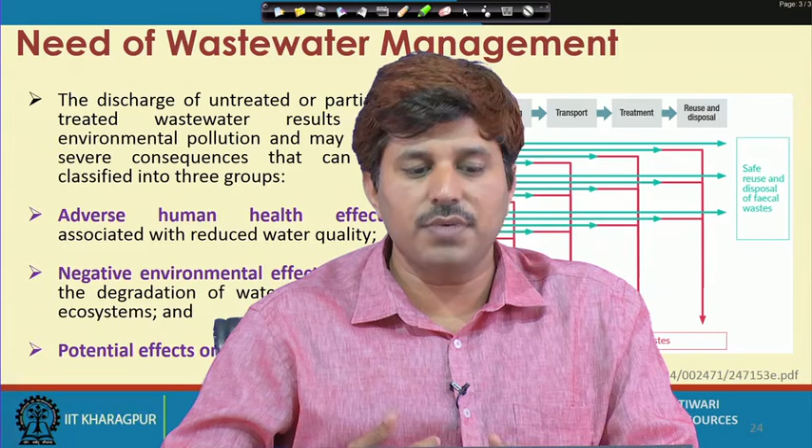To begin with, first thing comes that why we need wastewater management. We have been using water since ages. We have been letting the used water or wastewater or sewage, whatever we call it, flow in our natural systems, either rivers, soils, anywhere, and we have not been bothering since few centuries back. But with the progress of time, with more and more population increase, and the development taking place in the form of a lot more urbanization, where a huge population lives in a relatively smaller area,

thereafter industrialization. So, all these things have in a way concentrated the load in a much more qualitatively as well as quantitatively concentrated form. So, the bulk of pollution getting released at one particular point, one particular location or one particular state has started creating several problems, multifold problems.

The discharge of untreated or partially treated sewage typically results in environmental pollution, and everybody accepts that. It may have severe consequences that can be classified into 3 major categories. So, one is the adverse human health effect, which is primarily associated with the reduced water quality. Wherever we discharge the wastewater, the wastewater itself is of poor quality, and whenever it meets a natural water system, it basically pollutes that as well.

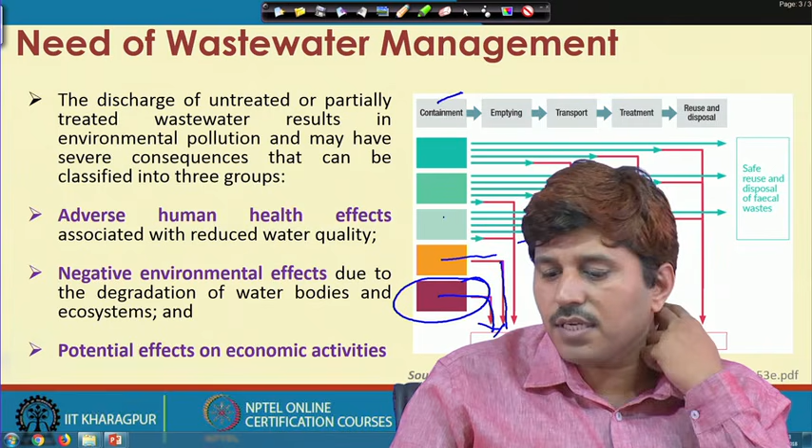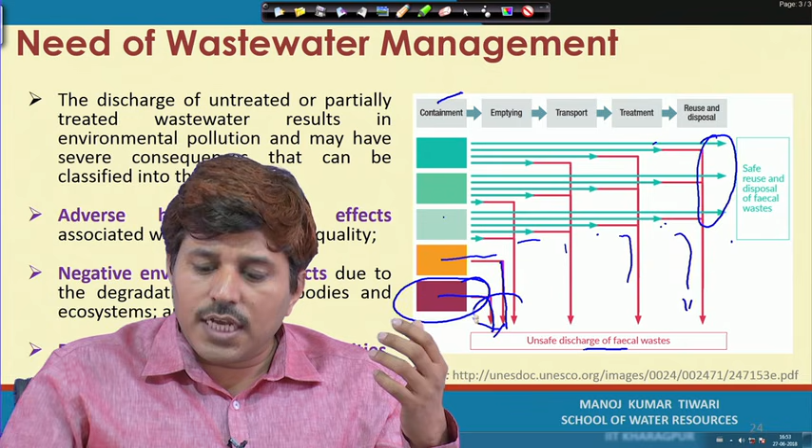But if that is not adequate, at whatever stage it is getting discharged, unless it is completely treated and properly reused or disposed of, at whatever stage we are discontinuing it, the level of risk could be different, but there is a risk associated with it. These are probably the most dangerous or most risky options. Here you have achieved some partial degree of treatment.

So, the red line that you see here has much less threat as compared to this red line, but this one also is not totally safe. So, there is some degree of risk involved in this as well if it is an unsafe discharge, because it has not been adequately or properly treated. So, those kinds of issues come in there.

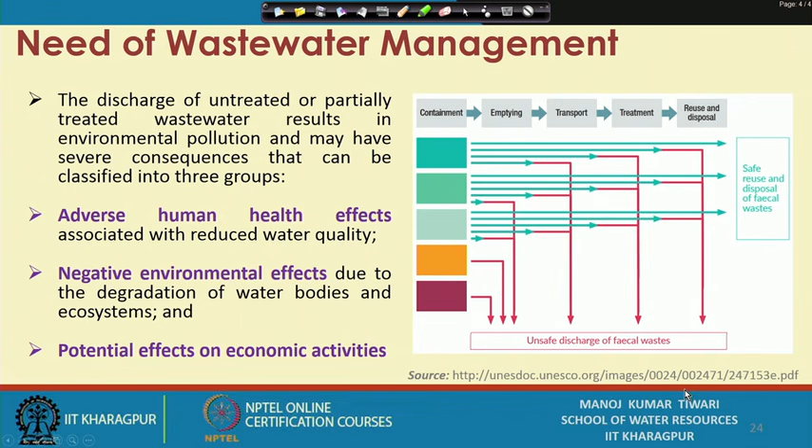Now, as we were discussing the three broad groups of adverse impact, first we see human health impact. Sanitation or wastewater related diseases remain widespread in regions where poor wastewater management practices are adopted. If the practices are not good, if there is no proper sewer line, if the waste is not channelized properly to a treatment facility, then there is always a chance of human exposure to that wastewater, and such exposure imposes a great degree of risk for human health.

If we see the World Health Organization report, they claimed in 2012 that around 8.5 lakh deaths in middle and low income countries were caused due to contaminated drinking water in that particular year. So, it is either due to contaminated drinking water or inadequate cleaning and sanitation services. This includes not proper hand washing facilities, not proper toilet facilities, not proper sewer connections. If these services are inadequate and the drinking water sources are not good enough, that attracts a great degree of health risk.

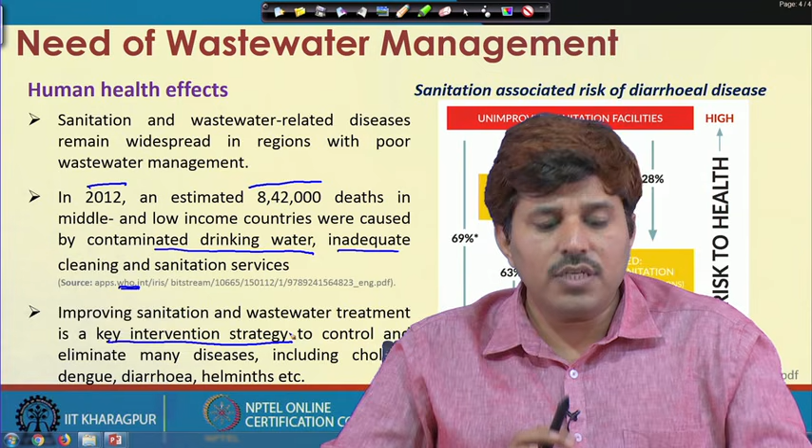The idea is that improving sanitation and wastewater treatment is normally accepted as a key intervention strategy. People believe that if we provide proper sanitation and wastewater treatment facilities, we can eliminate many waterborne or water based diseases. This could include cholera, dengue, diarrhea, and many more.

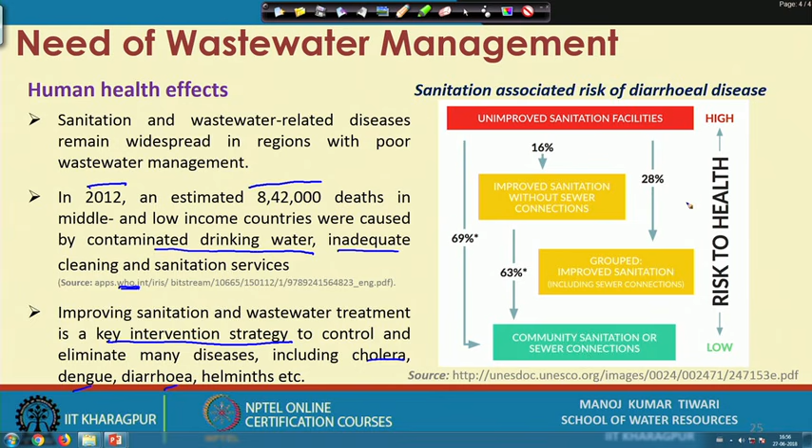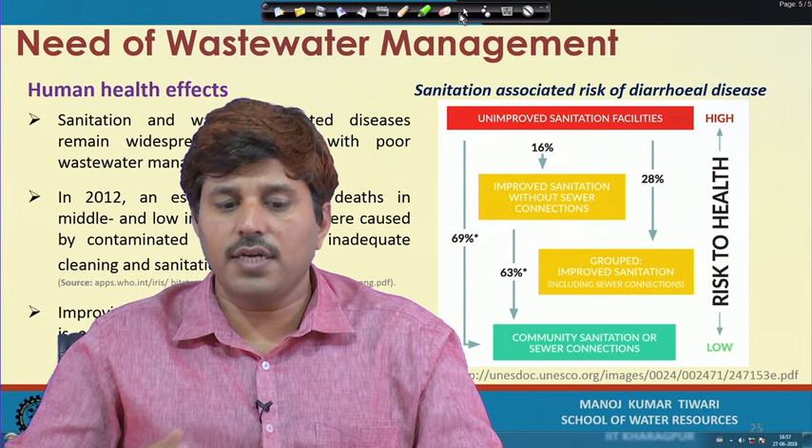A study has shown how the risk of diarrhea reduces with proper sanitation facilities. With an unimproved sanitation facility, the risk is quite high. With around 16% improvement, the risk reduces, 28% further, up to around 70% reduction. With community sanitation or sewer connection, the risk is very low for such diseases. So, the human health aspect can be considered one of the important factors which emphasizes that there is a severe need for good wastewater management practices.

There are environmental effects as we were discussing earlier. If we are discharging polluted water into the receiving body, that body will in turn get polluted, along with the water resource available for direct use. When we consider the effect on nature, we are not just bothered about human consumption; aquatic and terrestrial ecosystems also depend to a large degree on surface water bodies.

So, in all those ecosystems, you are having contaminated water in a river. Your fishes are likely to get contaminated, and animals depending on that river for drinking are likely to get exposed to such water. So, it poses a great risk of environmental damage as well. If the water available for direct use gets contaminated, we are exposing our ecosystem to contaminated water. Lately, water pollution has been increasing in most of the rivers in India.

Later on, with further urbanization, the condition once again started deteriorating around the 60s or 70s, and then they further tried to revamp that. They moved these treatment plants out of the city. So, quite a few efforts have been made in order to restore that river. Those kinds of examples are there even in the developed world as well.

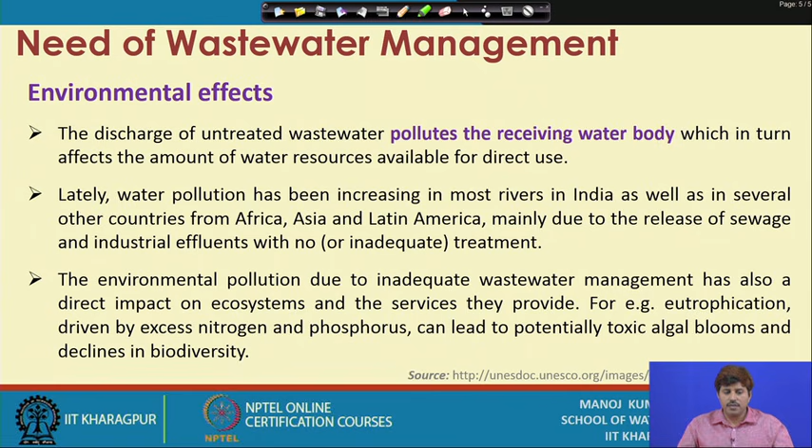Environmental pollution due to inadequate wastewater management also has a direct impact on ecosystems and the services they provide. Okay. For example, take a lake which is receiving effluent or wastewater rich in nitrogen and phosphorus. That will obviously lead to algal bloom or eutrophication, which is potentially toxic for the biodiversity of that lake. These kinds of environmental effects are very prominent and often seen.

There are economic effects as well. Economic effects are mostly indirect effects though. Okay. Human health effects, if we are relying on contaminated water, one can see directly. Most of the environmental effects can be seen directly, some are indirect as well, but there are a lot of indirect economic effects.

Consider that you are adding untreated or inadequately treated water to a river, the water is getting polluted, and downstream some city relies on that river for drinking water. If they withdraw that water, they have to provide a certain degree of treatment to make it usable. If rivers are in pristine stage, very little or nominal treatment could do, but if you are contaminating the river with severe or industrial pollutants which are unacceptable for potable uses of the water...

then the downstream city or municipality has to arrange for that degree of treatment, which may incur huge cost. Okay. So, this becomes a burden: because somebody is polluting water in the river upstream, the downstream areas suffer.

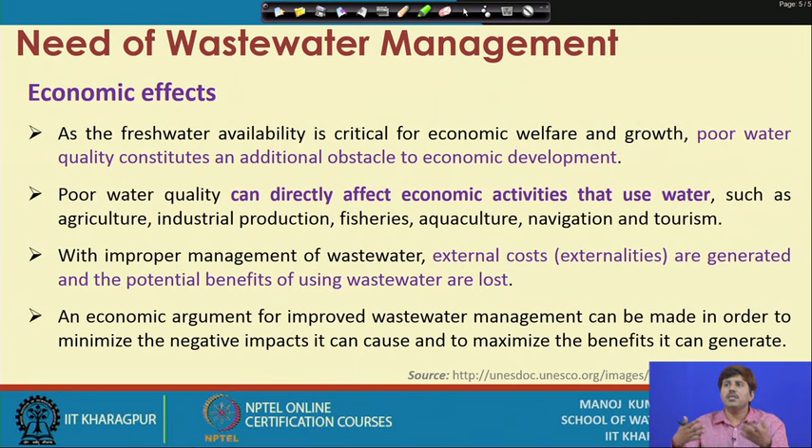We have seen news coming in that our food grains or vegetables are polluted with this particular contaminant, sometimes pesticide, sometimes these things. So, how is it coming? Because we are irrigating improperly, we are irrigating with not so good quality of water, or we are cropping in a soil which is already contaminated. So, if such cases arise, that will obviously lead to adverse effects on the productivity, on the acceptability of those goods.

Many times, if there are issues with the quality of any of these food grains or food materials, or other products also, many countries will put a ban on the import of these goods. So, you are doing fish culture on a much larger scale, using some water which is not of good quality.

And if your fish is uptaking some contaminant, you probably will not be able to export that fish to the western countries or to the developed world, because they have their own quality control, and if they figure out that it is being grown on such contaminated water, they may actually refuse to take it. So that could incur a huge economic loss.

For tourism purposes, a lot of our water bodies attract a lot of tourists, but if the quality of water deteriorates, probably that business is completely going to die down. Then there are many other such activities.

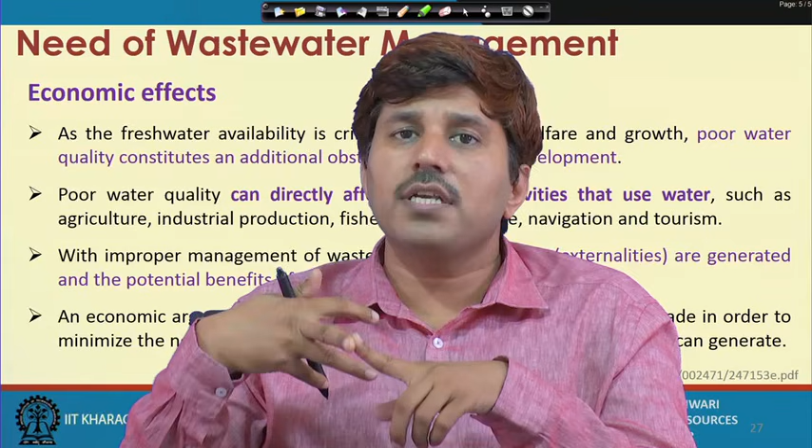So, all things eventually are connected. Your bad environment will lead to bad health, will lead to more cost of treatment or medical facilities. So, all these things are connected, and overall, holistically, this appears as a fair proposition that the wastewater should be treated and reused as a resource, so that its adverse effect on human health, adverse effect on the environment, and adverse economic effects could be saved.

So, these are some of the examples of impact we have been discussing. Impacts on health: there is increased burden of diseases. There is impact on environment in the form of decreased biodiversity, degraded aquatic ecosystem, foul odors and all that. And there is a long list, with quite a few points mentioned in the impact on economy as well.

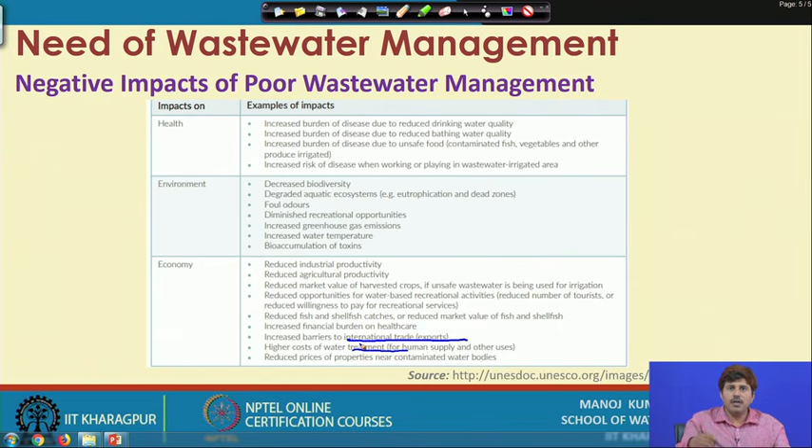So, reduced industrial productivity, agricultural productivity, fish and shellfish catches, financial burden on healthcare, increased barrier on international trade, as we were discussing that exports can also be affected. The higher cost of water treatment, the point that we were discussing. So, more or less the points that we have discussed, some of them are listed over here.

Now, by now we realize that wastewater management with an intention of recycling is good in a way that it gives multifold benefits. And the risks in terms of human health, environment or financial losses are huge. So, that is why one should think about the reuse and recycling of wastewater as a fair proposition.

Now, for recycling wastewater, people believe that it is the most sustainable approach for wastewater management. However, if we want to recycle wastewater, we need the quality of water to be fit for the designated use, or for the purpose for which we are using the water. If we are recycling water, we are obviously going to use that water. For using that water, the quality of water has to be fit for the particular use.

Now, how would the quality of water be fit? We are talking about wastewater, and everyone knows that the quality of wastewater is quite poor. And the water used for certain purposes, even agriculture, irrigation, household activities or industrial activities, is generally cleaner water, and we are talking about using wastewater for those purposes. So, what is essential is that the quality of wastewater needs to be improved, and it can be improved through suitable treatment processes.

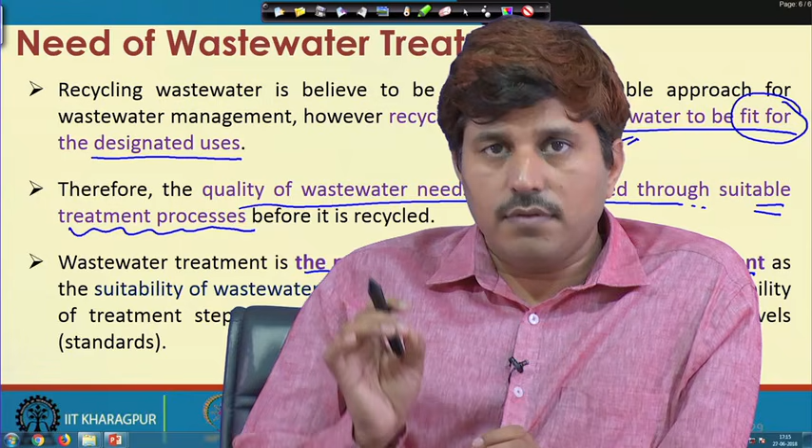Why is it most critical? Because in wastewater management we have different options. We can let it discharge to the river, or we can use it for a certain designated purpose, and we see that reuse or recycling is probably the best approach for wastewater management. And for recycling or reuse, we have to ensure that the quality of treated wastewater is good enough for the recycling application, and that can only be ensured with a good and adequate degree of treatment.

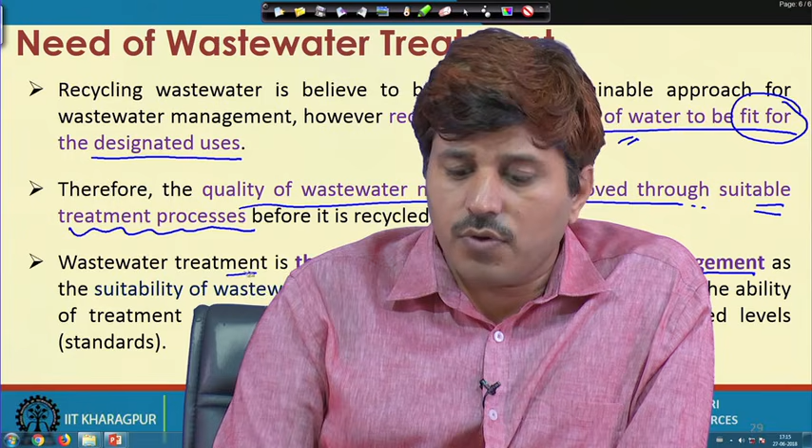So, that is why the treatment process becomes the most critical step, because this is what can actually produce water quality which can be reused, or even for safe disposal. This ensures that the water is suitable for either reuse or disposal. Even if you want to dispose, we should not dispose contaminated, untreated or partially treated sewage.

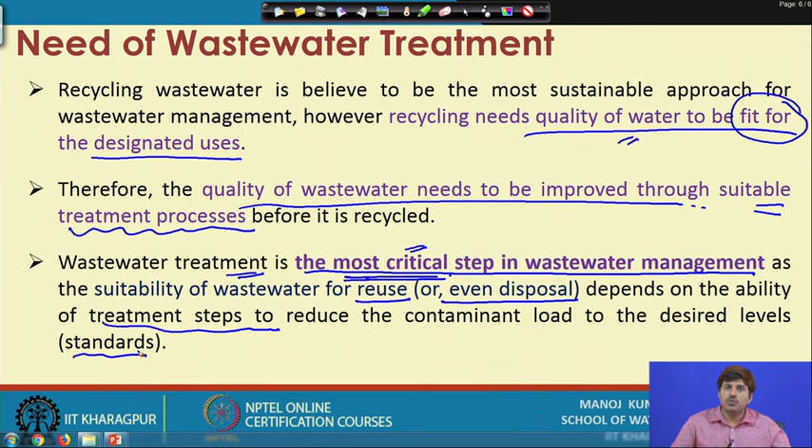This depends on the ability of the various treatment steps to reduce the contaminant load to the desired level, or the prescribed standard, because there are standards for disposal and standards for reuse. If you want to reuse or recycle water, it should meet the prescribed standards of quality. How can that quality of water be produced out of wastewater? It can only be produced by providing suitable, adequate treatment steps. That is why wastewater treatment is a very crucial and important aspect of wastewater management.

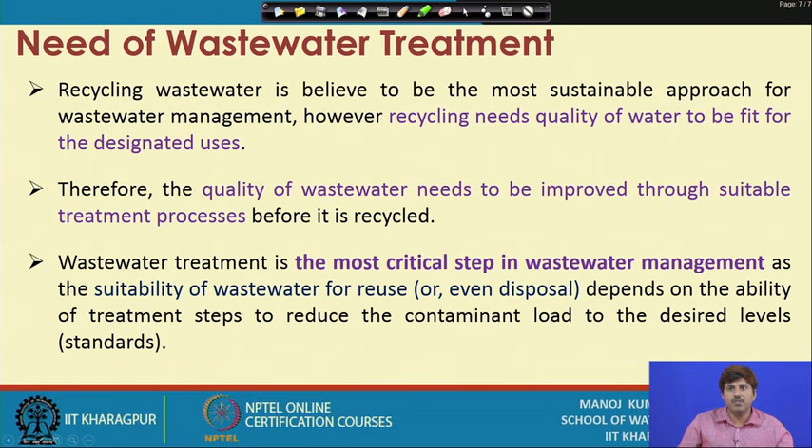Overall, you will see several steps in wastewater management. Wastewater is collected, channelized, brought to a treatment plant, it is treated, then either disposed or recycled. So all those things are there, but the treatment is essentially one of the most critical steps.

If we see the effective wastewater management cycle, there are various options. The prevention or reduction of the pollutant at the source is the first step. If we can prevent the wastewater from getting generated, or reduce the pollution at the source itself, this reduction means in terms of pollution load as well as volume of wastewater produced. So if we are producing 100 units of wastewater, and we can reduce that quantity to 20 or 30 units, we are saving a lot of polluted water from being produced.

Similarly, if we can reduce the contaminant load, then there's the removal of contaminant from the wastewater streams, which is actually the treatment step. Then the use of wastewater - water reuse or recycling - becomes the next step, and there is recovery of useful byproducts. From sludge and from water, if we can recover certain useful byproducts, that is also very important in an effective wastewater management cycle.

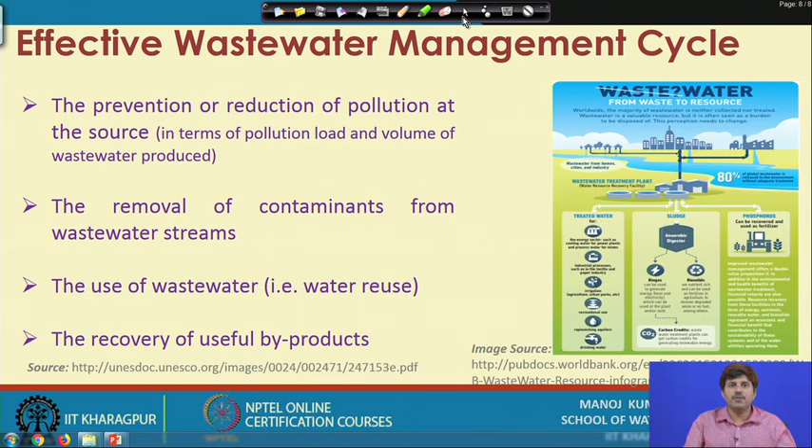And of course we can recover certain materials like phosphorus out of wastewater. So that way we can go for the recovery of useful byproducts, we can go for reusable quality treated effluent production through treatment, and of course, if we can prevent pollution at the source, that is one of the ideal cases.

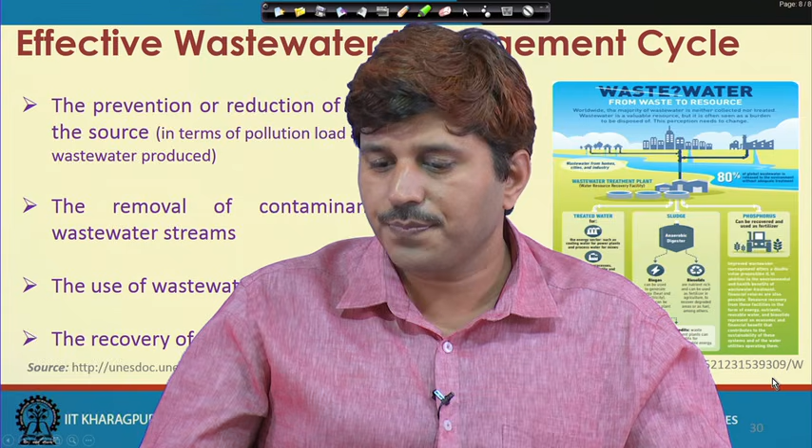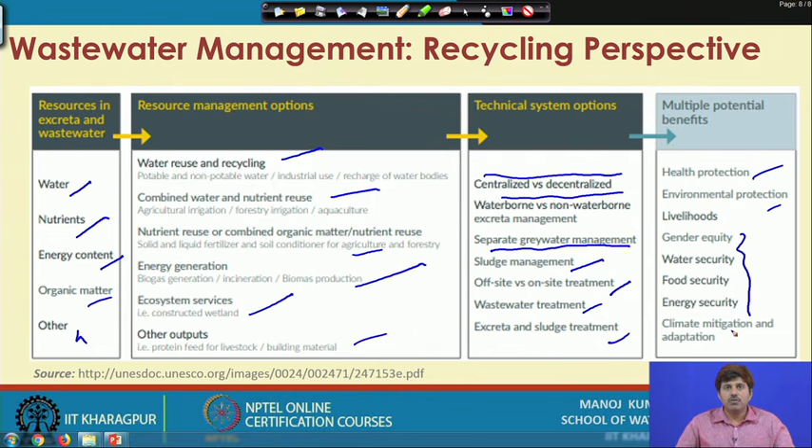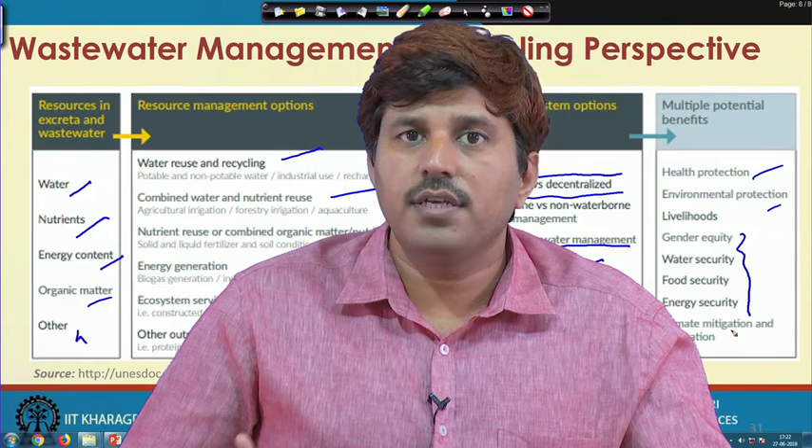So we conclude this lecture here, and in the last lecture of this week we will talk about the major issues and challenges, particularly in the wastewater management sector. Thank you.